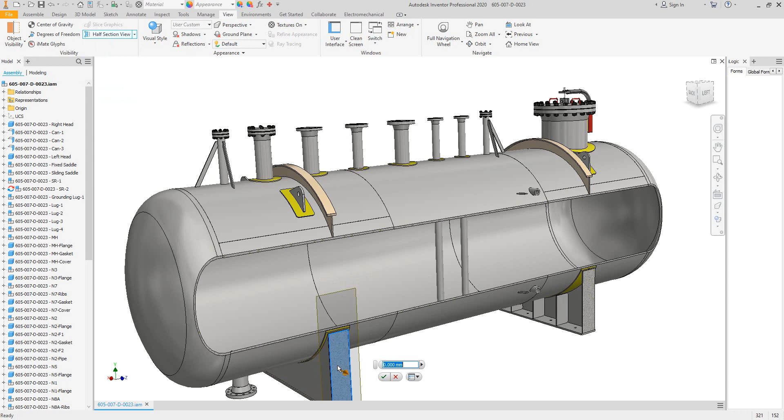Inshallah, in this part of the tutorial, we will discuss drawings creation. In the first part, we created the 3D model for this horizontal equipment. As mentioned in the previous tutorial, we made this vessel with those attachments, and today inshallah we will make a new element to include in the 3D model.

It's not included in the SEG library, so we will generate it manually and add it to the 3D model, and we will learn how to add it to the SEG bill of material to export it to our drawings. At the beginning, we will create those two clips here, and we will use a new type for the plates available in SEG.

If you select nozzle N2 pipe, which is this nozzle, and from external attachment, we will find a long plate. So we will select this one and make it support one, and from here let's select a longitudinal plate. You can make it external or internal, but in our case it's an external plate.

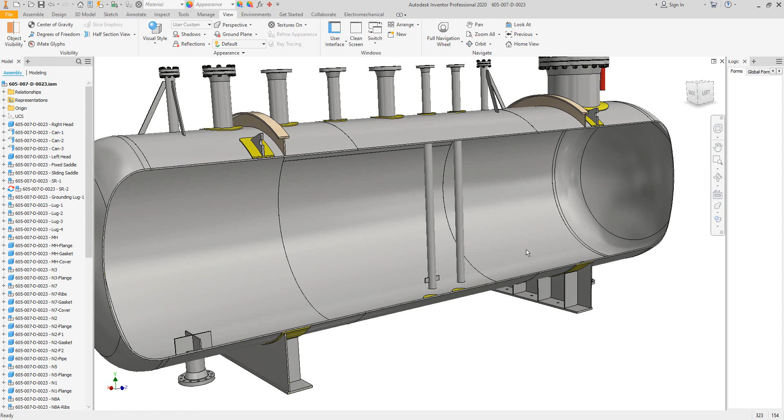Okay, now as you can see here, that's the clip, and we may need to rotate it 90 degrees. After that we will make a modification by adding a hole to this clip. So from here we will change the orientation to 90 degrees, increase the location a little bit, and click save. Let's add another clip to nozzle N9.

So from here we'll select elements, external attachment, long plate, and N9 support one. Let's keep all information as it is, and select 'looks like' N2 support to avoid repeating the information again, and click start the assembly to modify the first clip and create the other clip on nozzle N9.

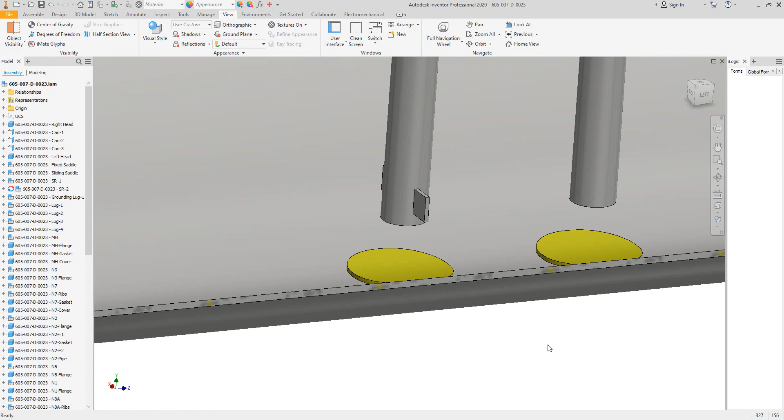Okay, now we have those two clips, and we need to make a hole cut on the first clip. So let's open the first clip from here, create a sketch, and add a point defined vertically to the middle and to the middle of the horizontal. Click finish, and from the hole feature, define the hole diameter to be, let's say, 14 millimeters, and click save. We will do the same thing with the second support.

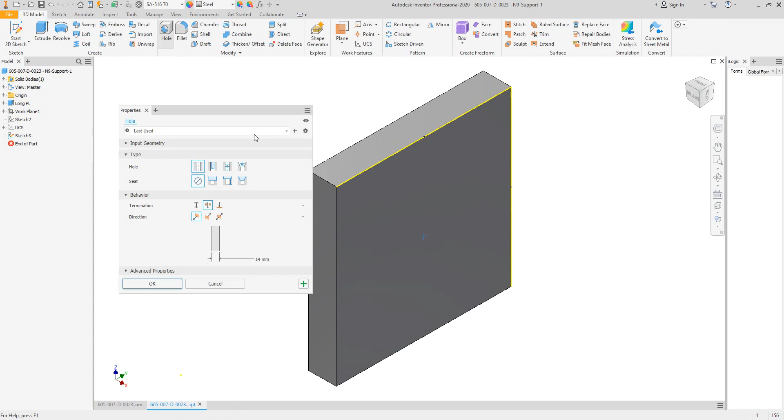So let's open the second clip on nozzle N9, add a hole at the middle, constrain it horizontally and vertically with the mid span of the plate, define the hole as 14 millimeters and click save. Now we've generated those. The next step is creating this part. This part is not included in SEG, so we will make it manually and learn how to create it and add it to the 3D model.

Okay, let's create a new part, create a sketch, and define the inside diameter of this equipment. Let's check the general arrangement. Here's the inside diameter, 1981. So 1981 is the inside diameter, and we have a pipe here with an outside diameter. Let's check the 3D model. It's a 2 inch pipe.

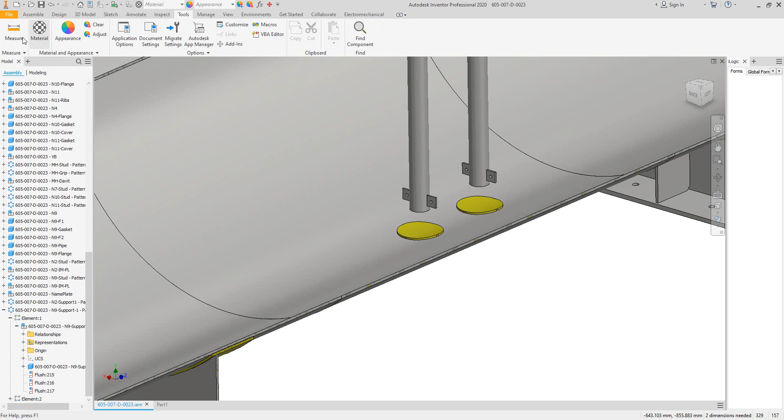If we select this one, that's the outside diameter of the pipe. Let's define this diameter, and we will measure the location from the drawing. Right now we have this clip with 50 millimeters on both sides, and a hole at the center with 14 millimeters, constrained horizontally and vertically with the center. So this point refers to the center span of the line.

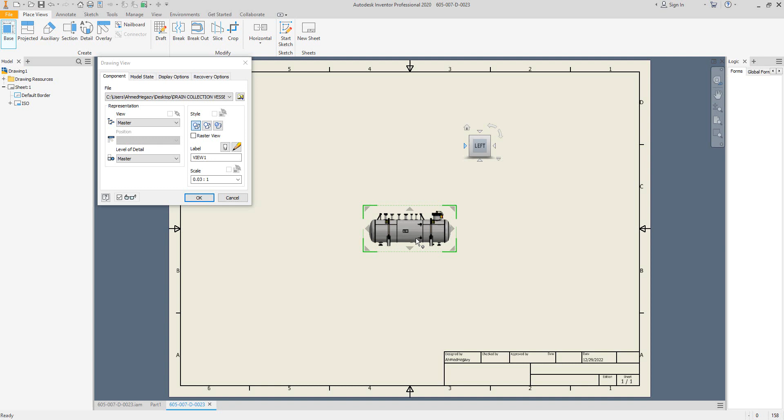Now let's convert all of those lines to construction lines, and we need to measure the actual location of this one. So let's create a quick drawing to check the dimension, add a view with scale 1 to 50, for example, and take a section before this nozzle, and measure the distance from here to the inside diameter of the vessel.

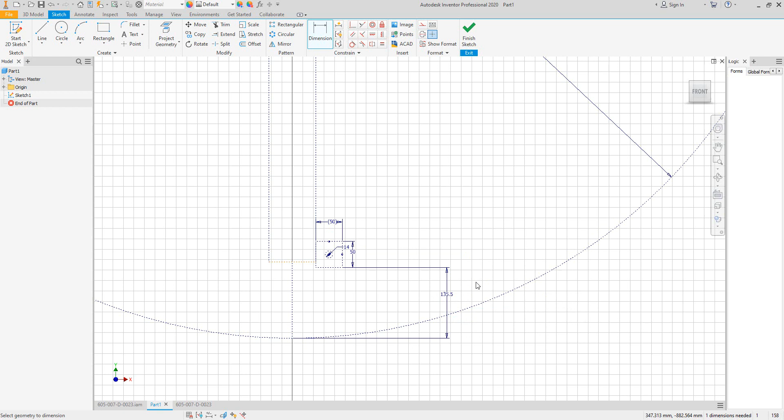So it's 350.5. Let's add a point at the center. From here to there, 135.5. So that's the location of this clip. Now let's draw the required clip with those dimensions.

Okay, so from here let's make that sketch, check that one. Okay, and again we have another line with 50 millimeters, so we have that one, and convert that one to construction line like that.

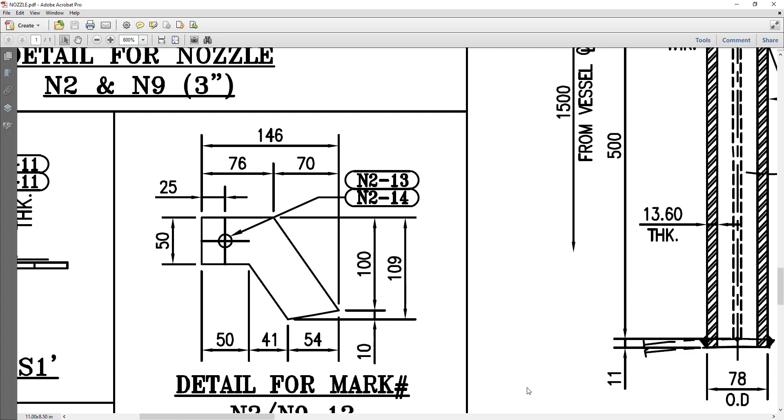Now we need to define those lengths, 76 and 70. So that value is 76 and 70. Okay, and for that one it's 41. So here it's 41.

One more thing, we need to add an arc here. So you can do it by using that one, which is arc, like that. Okay, and now let's finish the sketch and make extrude to this element.

So let's make an extrude with 8 millimeters. And from here, let's convert the material to steel. And the color, let's make it yellow, smooth yellow.

Okay, now we have this part. If we make this sketch visible, we can make a rotate or pattern, circular pattern for this part around the y-axis. So from here, let's select this pattern and make two plates from that one around the y-axis.

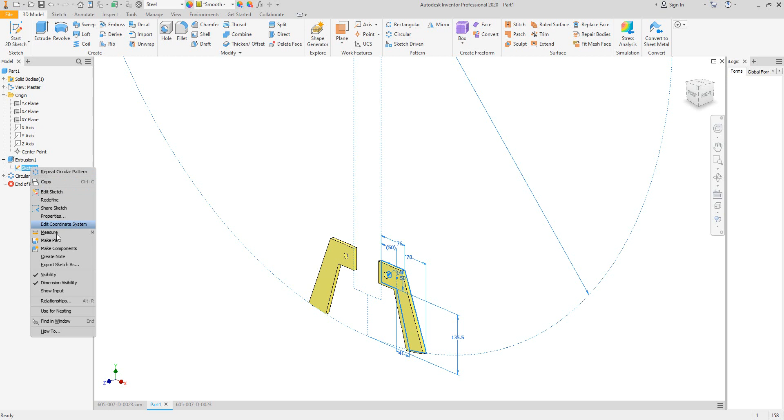And let's save this part. Now, if you try to save it from Autodesk Inventor by clicking on save, you will not be able to save. So for saving, you should open SEG software and from here select save document, save active document, and you will receive this form.

So from here, let's create a new project, external parts. So we will generate a new folder called external parts and add this part, which is N2 and N9 supports. Now let's add this part to the 3D model.

So from here, let's import this part. So from external parts, let's add those two items. And from here, we can make some constraints for that one.

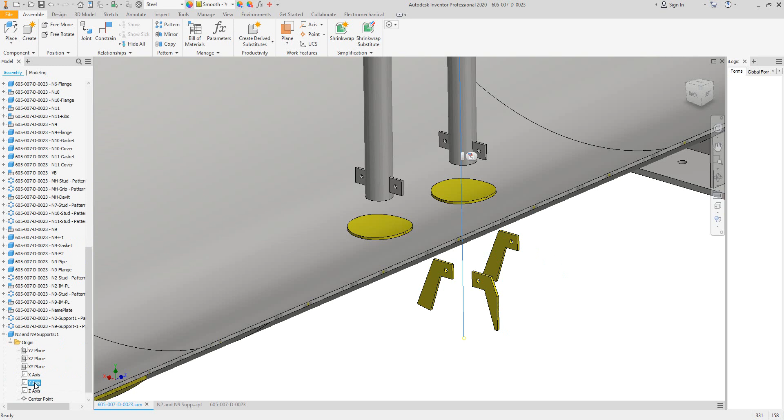So from here we have the first one for N2. We have the axis, which is y-axis. So we will make it with that one.

And from here, let's select that radius to the inside diameter of that one. So we have this support by that way. And if you try to move it little bit like that,

okay, so we can remove this constraint now, and from here we can make those parts by that way here fitted to that surface.

Okay, so it will be like that, and from here let's make that surface with that one, and we could rotate this plate a little bit back, okay, or make the extrude of this part to outside here. As you can see,

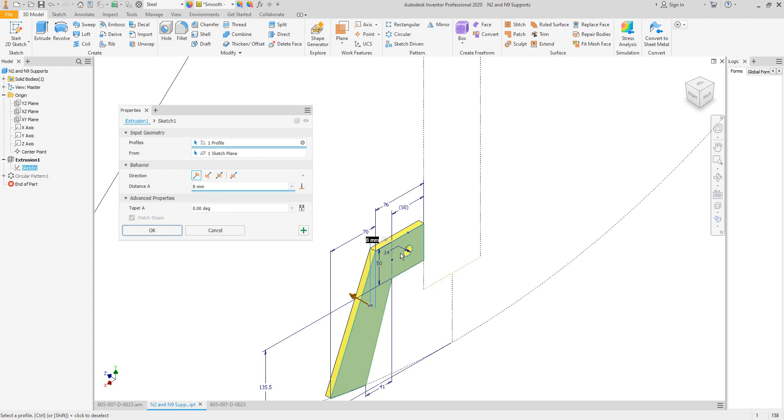we generated on that side, so we could move it a little bit with an offset from the main part. Okay, how we can do that?

As you can see, we have this work plane which is at the center of the part. So if we move it, take an instance from it with the half thickness of the plate, so the first plate, and let's move that at the beginning here, and from here let's define this sketch to be located on

that plane. Now in that case, you will get the correct configuration like that by moving this clip and make it shifted to the vessel.

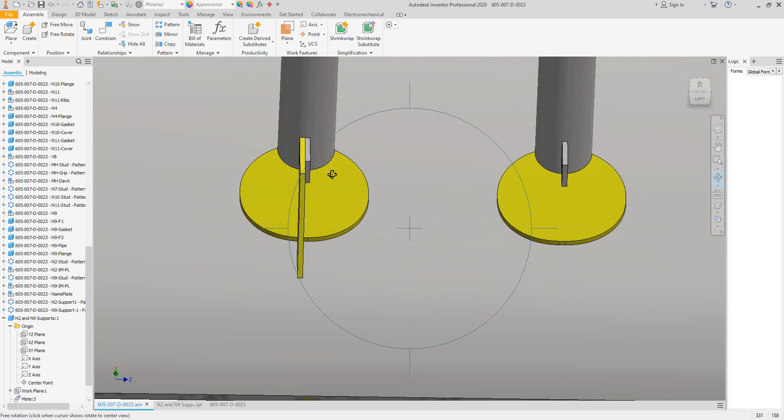Now the same thing, we will do it with the next support. So from here, let's make constraint with the center line here, and the same with the vessel center line with that one. And the same thing, we will do it

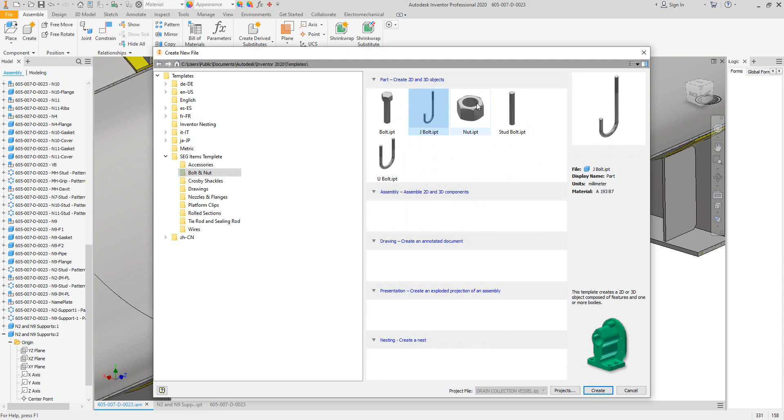here for that constraint. Now we have this support clips for this nozzle, and if you would like to add a tightening bolt for this one by using SEG library, external library, here from here, if you open the accessories, you will find some accessories here. You can use it for like bolts, nuts, if you would like to add that one.

Now we will learn how to add an external item to SEG bill of material. So from here, let's open the bill of material, and from external bill of material, let's select the vessel.

That's the first step. After that, let's add the quantity. We have 4 supports. The description is support clip, and for the technical characteristics, it's a plate.

Let's measure the dimensions of this plate. So the maximum height. Sorry, let's create a sketch here.

So let's make that one visible. And from here, let's measure the maximum width 146. Okay, and 177. Okay, 177, 146, 8 millimeters. Okay, the material is SA.

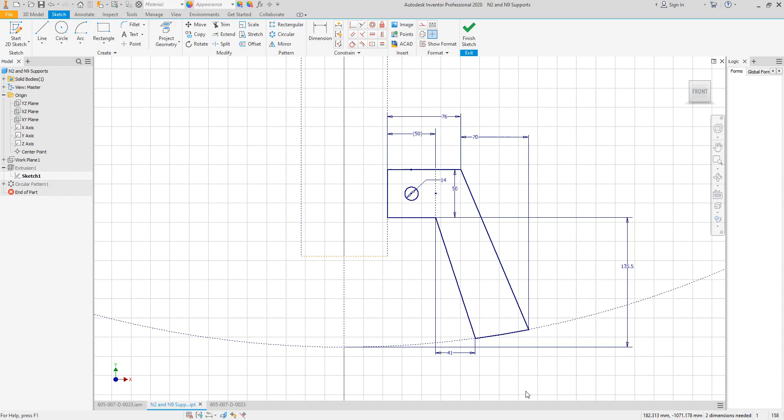That's the material, and for the weight, let's measure the weight for this part. It's 2.66 because we have two supports. For the part name, let's take the same name here, part number 1. Let's keep it as it is, empty. Now if you check the SEG bill of material, you will find the last row here for the pipe support. Now let's proceed to create our drawings.

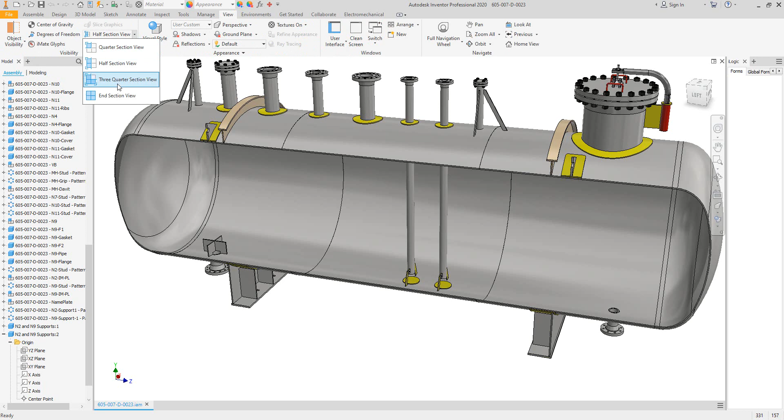So let's close this drawing, and we have the complete 3D model for the equipment. As we discussed in the first tutorial part, we generate the 3D model, make the modification for the stiffening ring, add all pipe supports, add the nameplate, add tightening bolts, and the manway. Now let's proceed with the drawings and take a look at how we can do that.

From the SEG tree, let's select the equipment node, and from here you will find the design data. Now we need to modify this design data. You have 3 different ways. The first way: if you would like to double click on the cell and modify the value directly from here, you can do that. By removing the selected checkbox, this value will not be exported to your drawing.

The second way is by importing an Excel sheet. That Excel sheet should be filled in a specific way. If we open it, you can see how to fill this Excel sheet. You should have 3 columns and no empty cells. You should have a value inside each cell, starting directly from A1 up to C12.

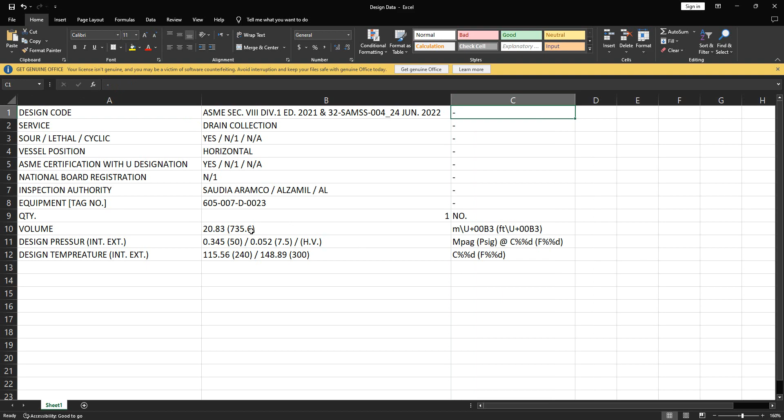Now we have those values, let's import that Excel sheet. From import Excel, we will select the design data file from the desktop, and SEG will ask us if we would like to empty the grid and fill it again, so we will accept yes. The previous design data will be removed and replaced with the new one. Let's click save. Now let's start creating the drawing.

From here, let's right click on the vessel, and from drawings, let's select create drawing, and define the drawing size. Let's select A1, and from the active view you can select the required views in your drawing. We will need to make an elevation view and a side view, after which we could make a key plan. Right now let's make 2 views: an elevation view and a back view, and define the spacing between them as 4 centimeters.

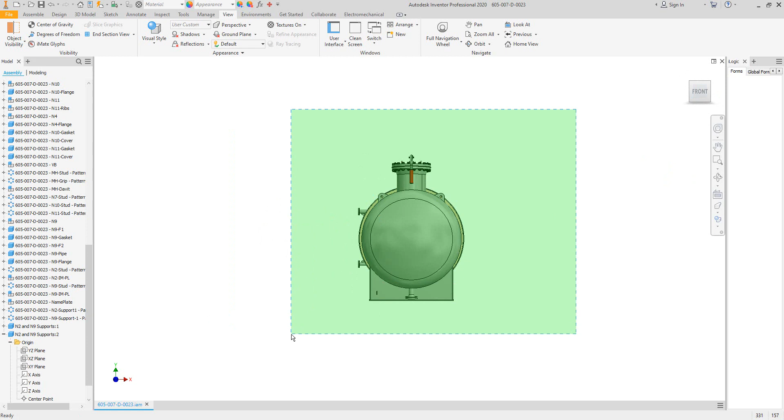Let's make the scale 1 to 14, and from here let's add the design data table, bill of material table, and the nozzle table. Let's add the notes too — if you have more notes, you can add them here. For the welding detail, let's open the welding detail section and select the required welding details.

From here let's add the drawing title: general arrangement. And this is the drawing number. From here, let's edit the revision table: revision 0, description 'issued for review', and prepared by.

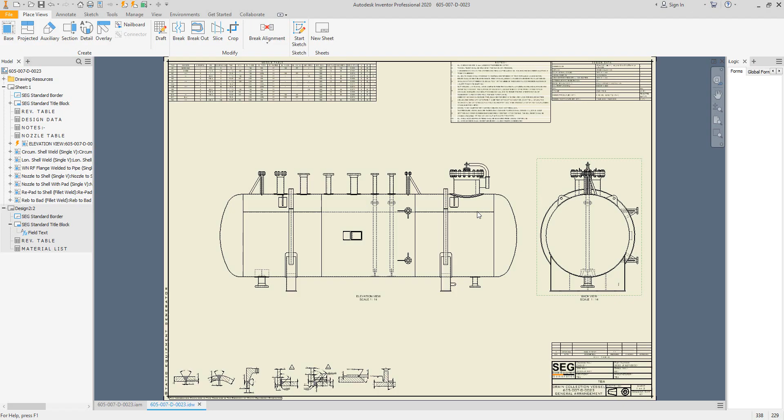Now we will make a modification on the second sheet, which is modifying the bill of material location. We will make it start from here, so let's arrange this one.

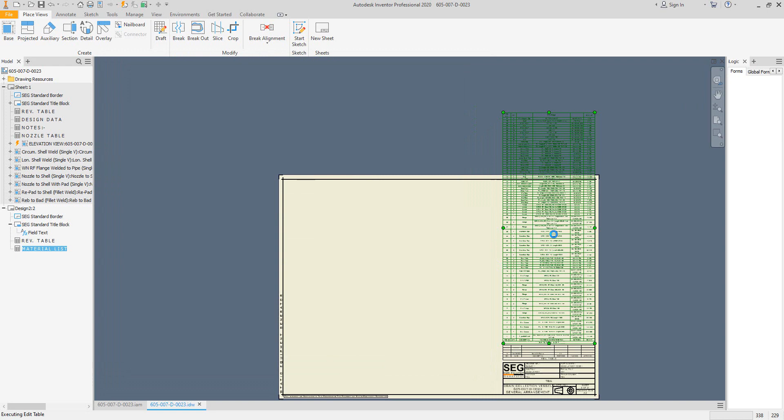From table layout, let's make the arrangement start from top to bottom like that, and the direction from top to bottom by that way. Let's click on save. Now you can figure that the bill of material arrangement will start from top to bottom.

So let's move the bill of material here. Okay, now that's the bill of material. You can increase the width of the cells by right clicking on that and increasing the width of the cell.

And the same thing we can do from here, increasing the width, and you can modify the alignment of the text inside the row by that way. So let's modify the alignment and click on save.

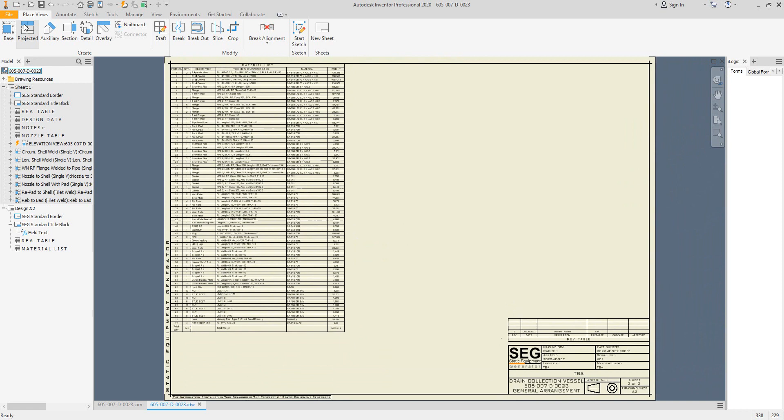Now we have a complete bill of material for your equipment, and let's add a 3D model view for the equipment here on that view. So let's make it scale 1 to 20.

Let's add it like that, and one more step we will do: let's remove this title, and from here we need to reflect the balloon item number for the items.

For example, if you select the balloons, from here you will find the different types of balloons. In that case, we will select item number balloon. If you select this head, for example, and select parts only, like that, you will find this balloon is empty. Same for the shell, if you select the shell, the other shell, you will find all balloons empty. So how to fill those balloons?

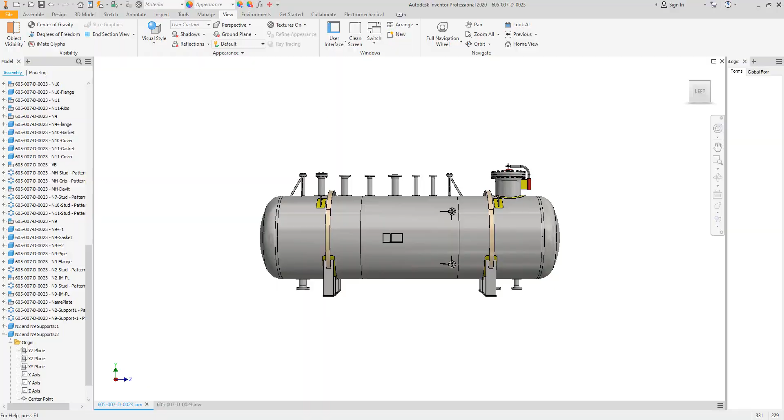From here, let's save this drawing, and let's come back to the SEG software, and from here we will select the update item number. This checkbox will give you the ability to reflect this item number to the 3D model on Autodesk Inventor, because

SEG makes a comparison between the items and selects the identical items. Like here in this flange, for example, we have 6 identical items: for nozzle N2 flange and N2 flange 2, N9 flange 1, flange 2, flange 3.

So SEG compares the description and the technical characteristics of the material and the weight of that item. If they are identical, that means they are symmetric or identical, so SEG will give them the same item number. So to reflect this item number, we will need to update the item number.

So from here, click on update item number. This process takes some time because it takes around 3 up to 5 seconds for each element. So we will wait until updating the item number completes our drawings.

Now, after updating the item number for the bill of material, if we come back to the drawings, automatically you can figure that the balloon will be filled. For example, here we have item number 1.

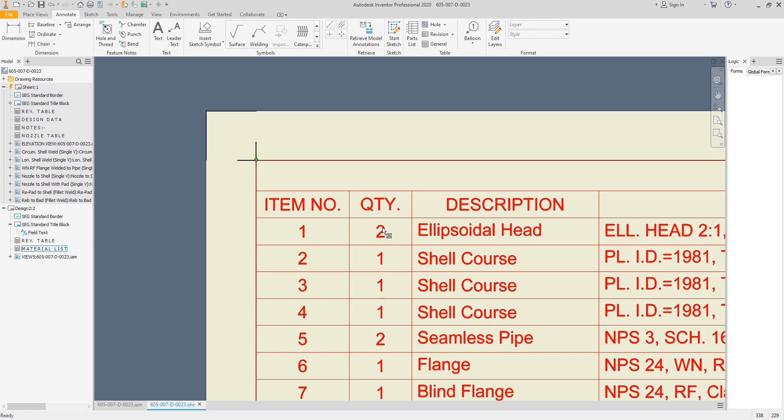If we go to the bill of material, item number 1, we have 2 items from this one. It's an ellipsoidal head with inside diameter with that value, nominal thickness, minimum thickness after forming a straight flange, and here that's the material and the weight for both items.

So if we select this item and select item number in bill of material, you will get that value. If we select this flange, it's item number 10. This pipe, it's item number 22.

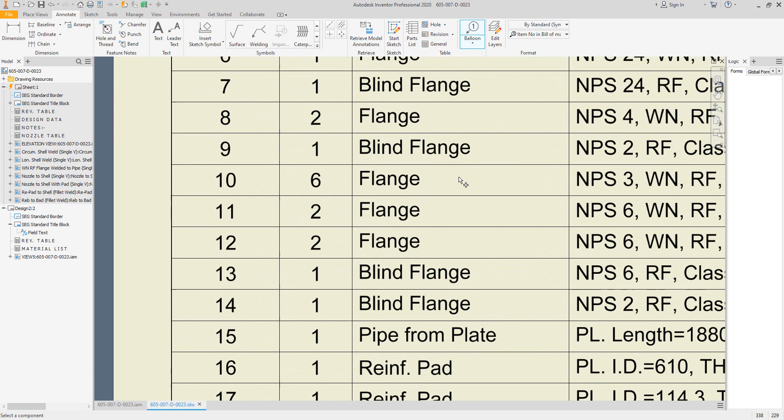So if we check item number 10, here it's a flange with 3 inches, weld neck raised face with class 150, schedule 160. And item number 22 is a seamless pipe, 3 inches, schedule 160, and that's the length of the pipe.

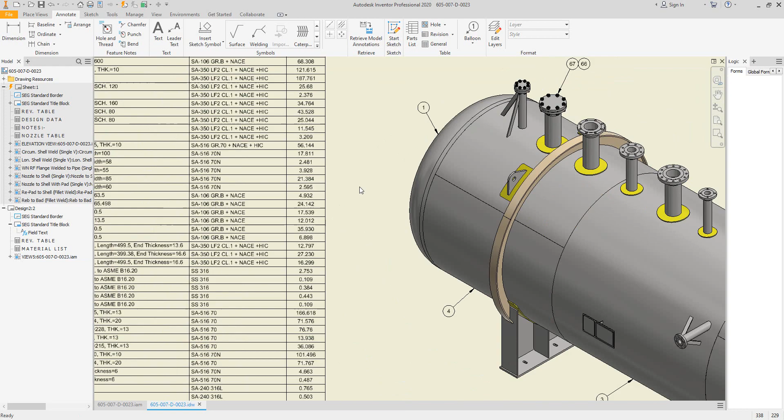Same if we select this stud bolt, for example, and here if we add a balloon for the nut, so item 66 and 67. So item 66 it's a nut, okay, and 67 is a stud bolt.

So by that way you can reflect the bill of material item number of the SEG bill of material to the 3D model and reflect it to your drawings.

Here let's come back to our drawing and let's create dimensions of this equipment by adding the definition of the inside diameter. So from here to there, let's define the inside diameter.

So from here, let's edit the text and add. You can see that the value is fixed, it's a constraint, you cannot change it if you modify the text. We will just add a notification that the inside diameter.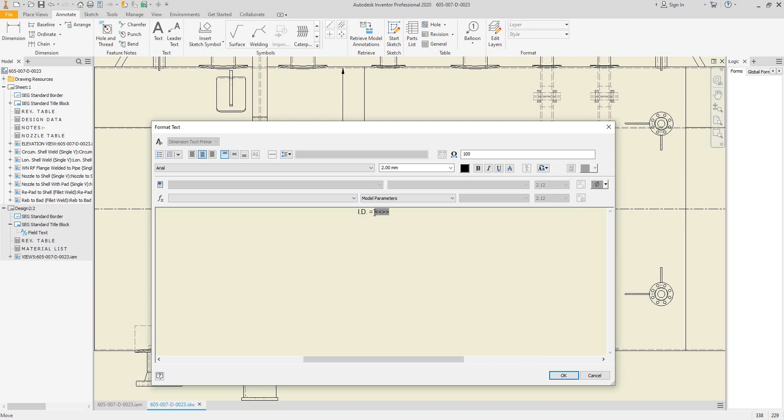Okay, let's add the tan lines here and on the other head. Those are the tan lines. And let's add the center lines of nozzles to define the location of the nozzles. So from here, that's the first center line, the saddle for those nozzles.

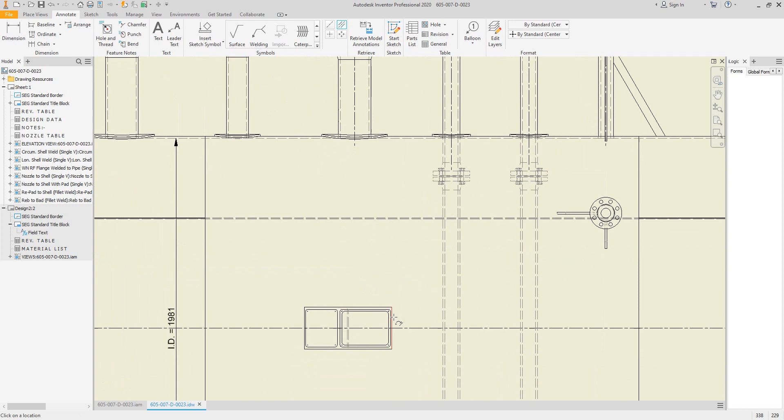That one. It's a nameplate nozzle. For the other nozzles, we will do the same thing. The second saddle, that nozzle for the lifting lugs.

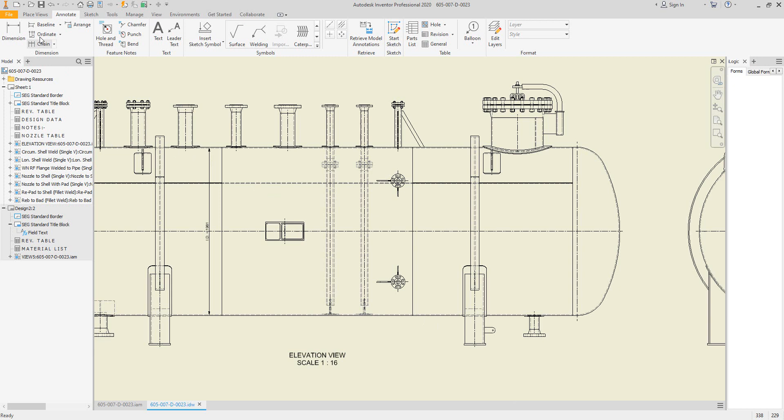Here you can figure that the datum line is located on the right hand side, so we will define the datum point to be at that line. So from here, from ordinate, we will select the vessel and define the datum line to be at the tan line. And now let's add the location of the nozzles for all nozzles like that.

So automatically it will appear by that way. The same thing we will do it at the bottom nozzles. So from here, let's select this one, select the saddles and the second saddle.

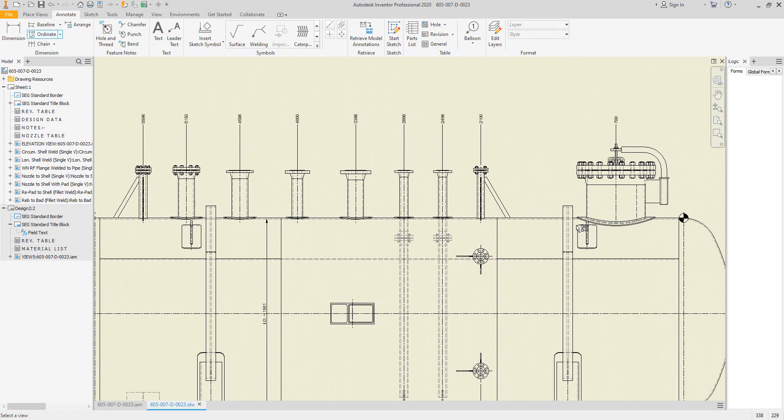And for the lifting lugs, we forgot to make it. So from here, let's select this one, the first lifting lug, and that's the second lifting lug.

Okay, now let's add the balloons, and let's hide the origin point. So from here, let's right click on any dimension and hide the origin point. Let's define the shell lengths.

So that's the first shell length, and that's the straight flange. The second course, the third one, and the second straight flange. And we will make a modification here for that one.

So let's define straight flange equals like that, and let's copy that modification here. So it's the second straight flange length.

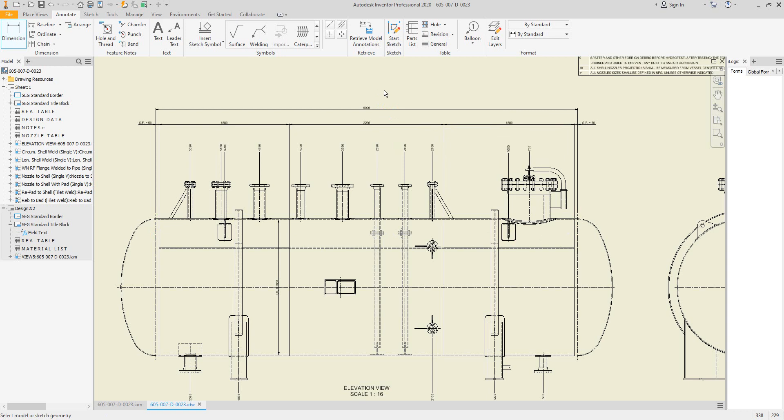Okay, now let's define the tan to tan. So let's measure the value from here to there, and let's add a text, tan to tan. Okay.

That value. And let's add the balloons for nozzles. So from here, let's select balloon, and from here select nozzle tag. So, and from here let's select the nozzle balloon. Okay, as you can figure, we selected the manhole flange, not the manhole nozzle.

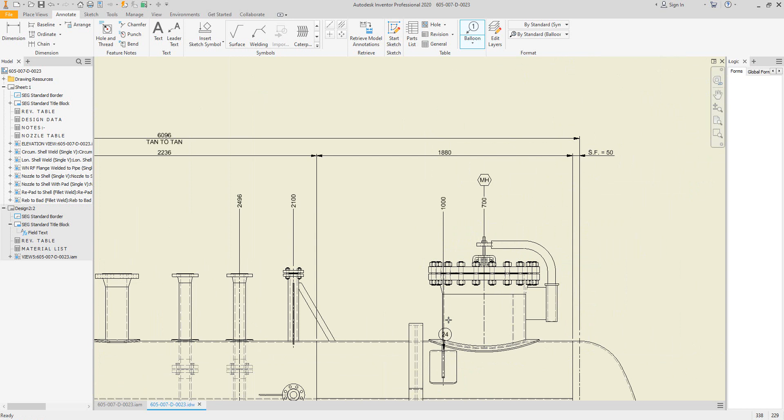So you can attach a balloon like that for the manhole and remove the previous balloon. And for the lifting lug, let's select the lifting lug, and from here select nozzle tag. So it's lifting lug 1 for this nozzle.

It's N7, N9. Okay, that's the flange. So by the same way, let's select the nozzle itself and remove that balloon for the flange. Select a balloon for the nozzle tag. Like that.

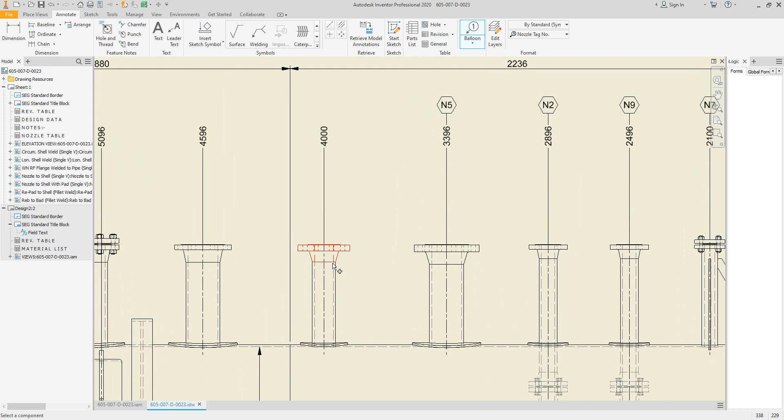Make it aligned with the next balloon. No problem if you cannot select the nozzle, you can select the flange. After that, define the balloon of the nozzle in a correct way. Like that. Sorry.

Make it aligned by clicking on Control during selection. For this nozzle, we will select the nozzle itself, and the same for the other one. Select the nozzle, not the flange, and remove the balloon of the flange. So we have the balloons like that by that way.

And here let's add another balloon for that nozzle. So let's select this nozzle, and from nozzle tags, let's add a balloon for this nozzle. So from here, let's select this one. Sorry. Continue. And the same for this nozzle.

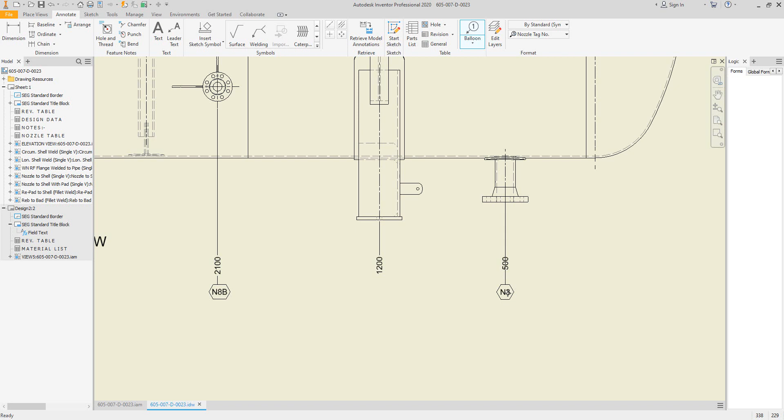We could select, sorry, we could select control during selection to make it aligned and perpendicular to another nozzle. So same thing here. That's the sliding saddle, and here we have the fixed saddle.

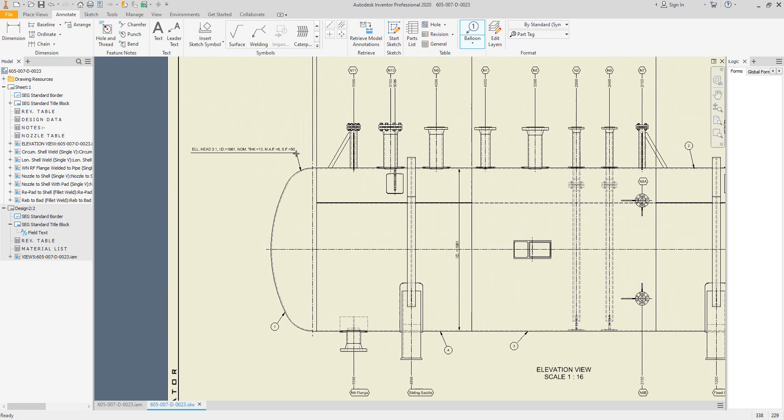Okay, and if you would like to add some related balloons, define the item number like that for the main items, like the shell courses. And if you would like to add a notification like the part tag, like this head description, you can add it like that.

For that same view, we will add some notification like longitudinal welding line orientation and the datum line. So from here, let's select that view and click on S, or from here you can select sketch, start sketch. So you can add some lines or text over this view. So from here, let's define the datum line.

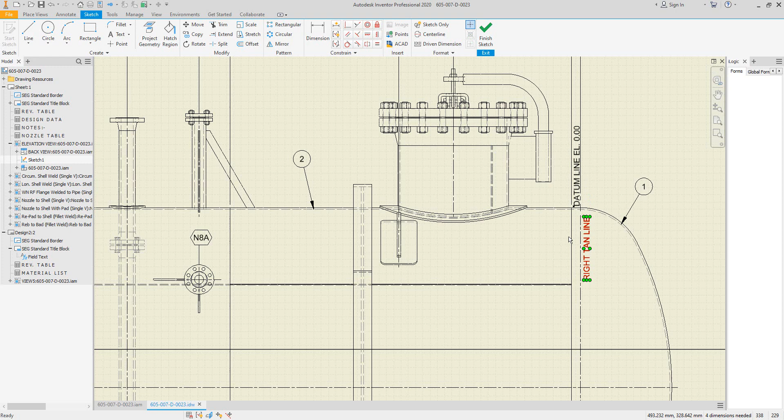Okay, that's the datum line. And let's rotate this value counterclockwise. So that's the datum line. And if you would like to add a right tan line, well, like that. Okay, rotate it like that. And take a copy from that one, from here to there, and define it as right tan line, left tan line, like that.

Now let's add the seam line orientation. So it's longitudinal seam line 1. Okay, that's the longitudinal seam line 1. So let's take a copy from that one to here, the second longitudinal seam line and the third one. So that's the second one, and here the third one.

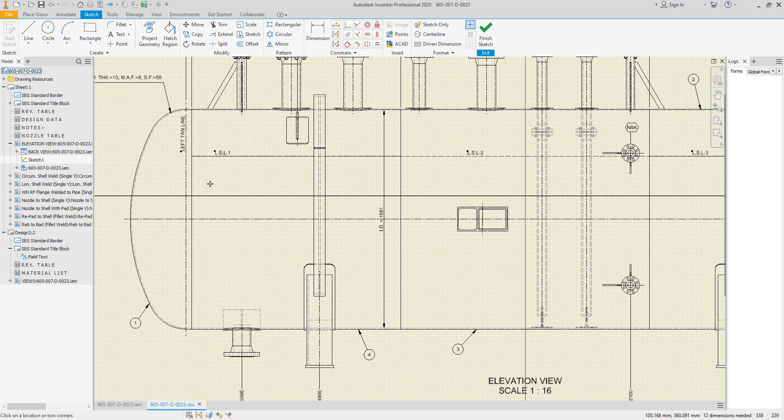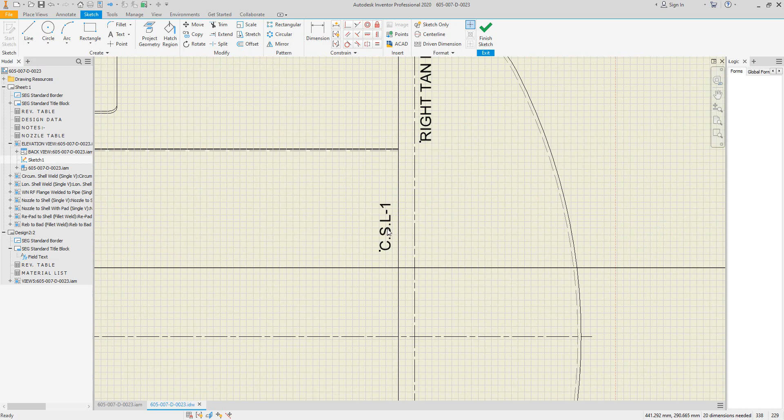And let's add a circumference seam line 1, and let's rotate it like that. Take a copy, select first, and take a reference point. We have that line, another line here, and the last one. So that's number 2, seam line 2, 3, and the last one, number 4. Okay, now let's click on finish.

To define the accurate center of gravity of this one, you can generate it automatically from here by clicking on the view, and from here select center of gravity. So here that's the center of gravity, and by using the SEG blocks you can add this to define the center of gravity of this equipment in the empty case.

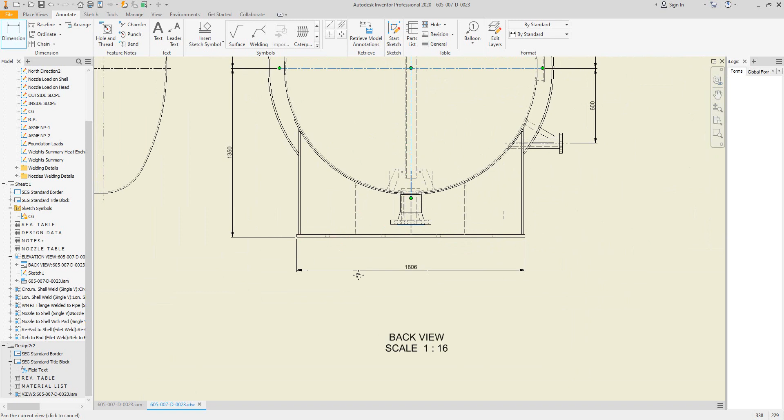Now let's add some other dimensions here on the other view, like the saddle height, the base plate width, and let's move this title down here, the offset of both nozzles, the projection of the nozzle. So from here to there, let's measure to the facing of the flange. The same thing we will do with the bottom flanges, the projection for the bottom flanges, and the projection of those nozzles to the center line.

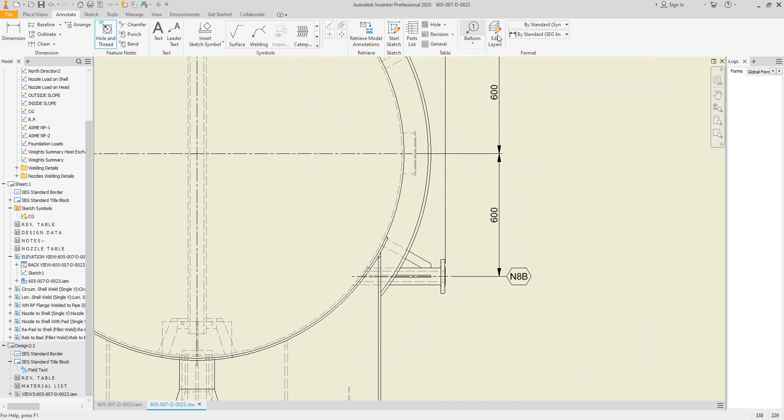So you can add that value like that here, or you could move it a little bit to the top here, so that will be the center line from the top, like that. And let's add some balloons here and there. So that's the nozzle tag. Let's select nozzle tag, and let's add that one here and there. The same for the nameplate. Sorry. Okay, and let's add a location for the nameplate here, because we forgot to add it. So you can move it down here, and let's add a balloon to the nameplate from the reference line.

Let's move this title below here, and let's define the location of the saddles and the spacing between them from the tan lines, like that. And let's add a key plan for that one. So from here, let's select project view, select that view, and let's create the key plan. And for this key plan, we will change the scale. So let's name it as key plan.

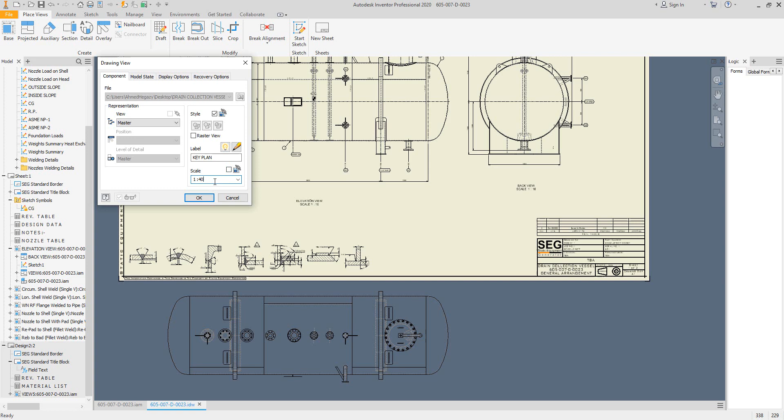And if you would like to make a modification on the text here, you can do that. But right now, let's change the scale. So let's make it 1 to 40 and break the view to be able to change the location of that one. So we can move it like that. So here it's the plan. So here that's the view, which is the key plan. You can move it up here, or if you would like to move it outside the drawing, you can do that.

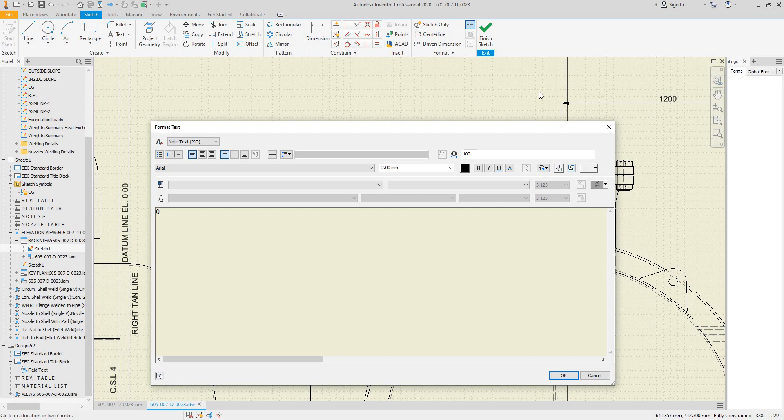And from here, you can define the longitudinal line orientation. So from here, the orientation of the vessel, it's 0 degrees, 90 degrees, 180, and 270 degrees. And here it's 0 degrees. Okay, and click finish.

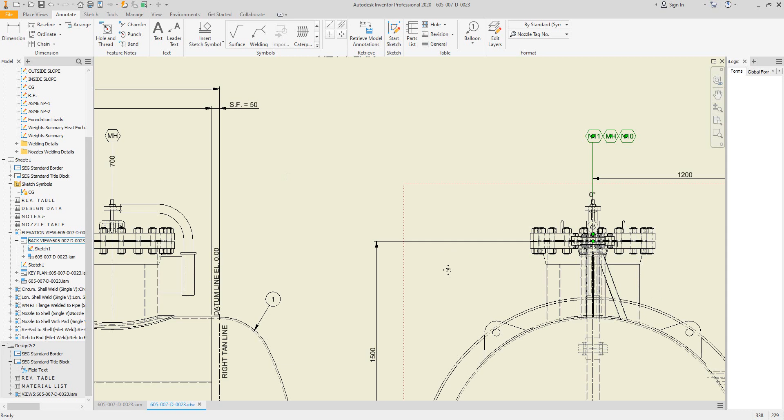Now if you would like to add some balloons at the top, you can add them that way, and by using attach balloons you could add the other nozzles that way. And if you would like to add another nozzle, for example N7 here, we cannot select N7 because we have too many lines, so to select it easily you can attach a balloon like that. After that, double click and modify it to 7. That way you can add a text like that on the balloon tag.

And here, let's make an extend for the center line. And for the balloons, let's select nozzle N4, and let's add attach balloon for the other nozzle, which is N3. Now we have the general arrangement drawing, which includes the revision table, the design data table, and the nozzle table here. Now let's add some welding notations.

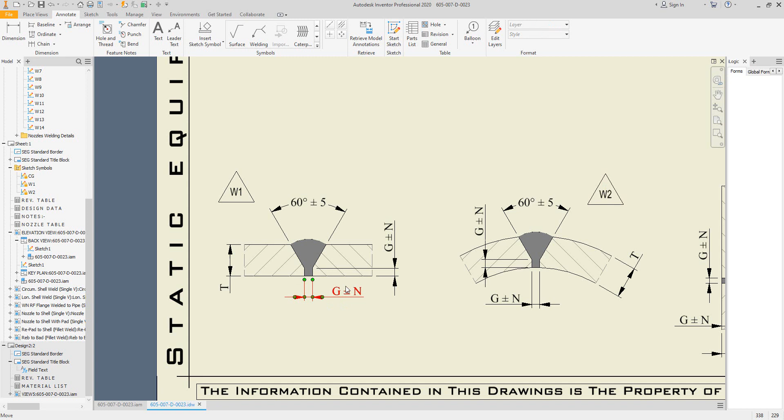For the welding notations here, we have this detail for the circumferential welding. So let's name it as W1, and here we have W2 for the longitudinal welding line orientation. And now if you would like to modify that, we can use edit text to modify this value as 4 minus 1, and here you can define that value, sorry, 2, and that value is 1. And you can use copy properties if you would like to define this that way, like that. The same thing we will do with that one.

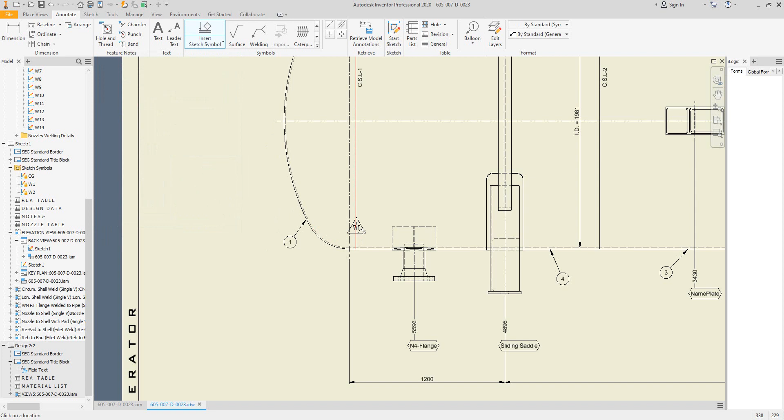Okay, so you can modify and change the welding detail. Now let's add this balloon and refer it on that drawing. So from here, let's select insert symbols, and from here let's select symbol W1 for the circumference welding lines. So we can define the circumference welding lines like that.

And for the longitudinal welding lines, let's select W2, so we can define the longitudinal welding lines like that. Sorry, let's move that one to here. And for the nozzle to flange, let's add welding line number 3. So it's welding line number 3 for nozzle to pipe. So from here, let's select style 3.

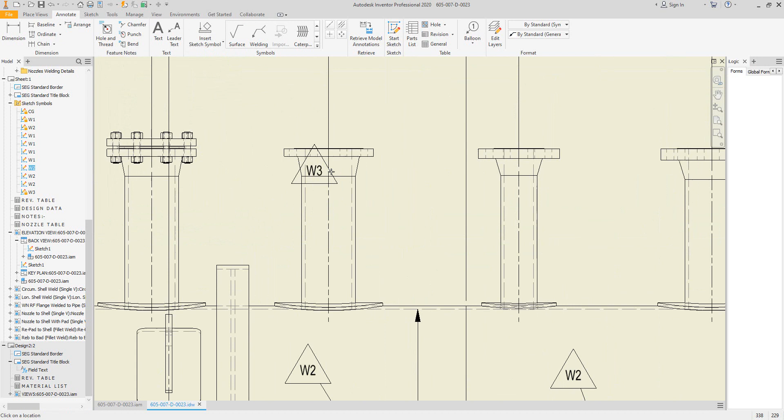Okay, and sorry, for those styles, it's welding detail 2, so let's modify it like that. Okay, and let's insert W3. So if you would like to modify something like that, you can add the welding style to the nozzle by that way. With the nozzle to shell for nozzles without reinforced pad, it's

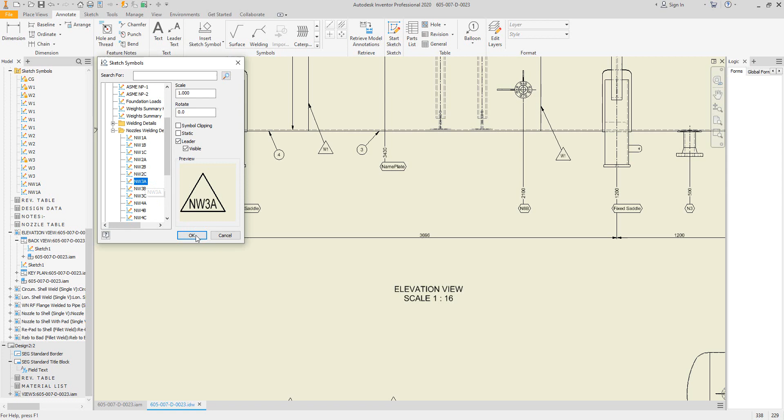NW1A. So from here, if you open the nozzle details, NW1A. So for nozzles without reinforced pad, the weld detail here will be related to that. And for nozzles with reinforced pad, it's NW3A. So from here, NW3A. So we can modify or edit the weld style.

By that way, it depends on your drawing requirements. So if you need to add something like that, you can add it. If you don't need it, it's up to you. Now we have the general arrangement drawing. We can deal with this general arrangement drawing by exporting it in DXF extension, DWG extension, or PDF.

So if you would like to print this drawing in PDF format, if you right click on the drawing, from here you can export to, and you will find here a list of extensions you can export to, like DWF, PDF, all of that. And you can make a save copy as by using this button. So if you click on save copy as and open this form, you will be able to select some other extensions like a PDF extension.

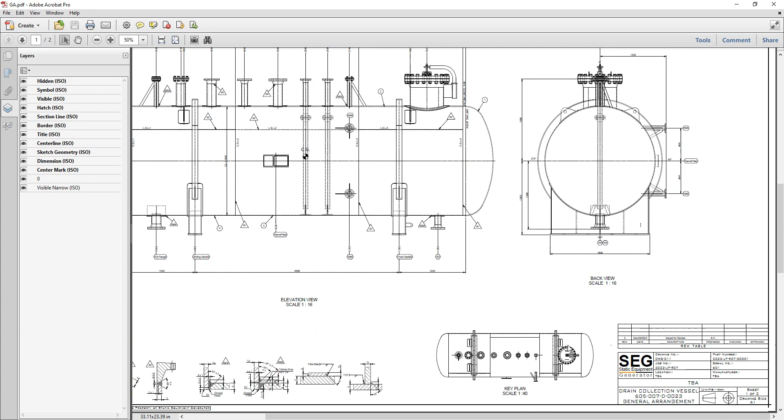And the second sheet includes the bill of material and the balloons, which indicate the item number in the bill of material. By the same way, you can make other drawings for, let's say, the support saddles, for nozzles, for any other attachment. So let's try that. So from here, let's select saddle 1. So let's select the fixed saddle. And from here, let's select right click and create drawing.

Let's select the size of the drawing as A2. Define the number of views. We will need 2 views. So for the fixed saddle, let's open the fixed saddle. Here we have the 3D model of this fixed saddle. And by the way, we need to take a look at the saddle from this view, which is the back view. So let's define the spacing, and the elevation view will be the back view. So that view, we will use it as an elevation view in our drawing.

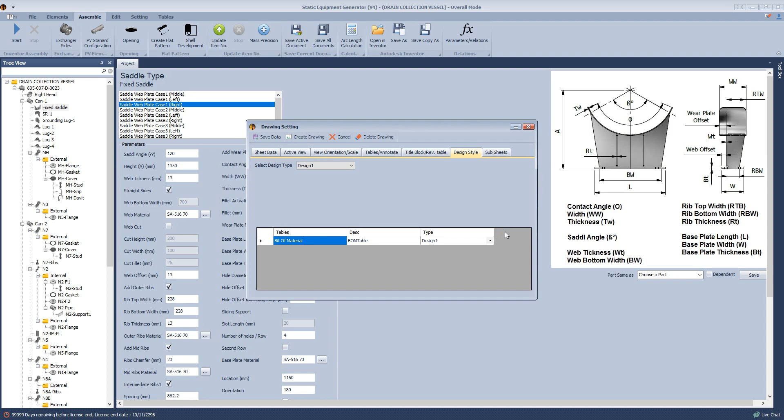So let's select that. And for the scale, let's make it 1:8. Let's add a bill of material to this one. Let's remove the notes and the welding details. From here, it's saddle detail, drawing number, and let's edit this table. It's revision 0. Let's add this one, other empty cells, and it's one sheet, and let's create the drawing.

Here the saddle details and the bill of material of the saddle. Now let's add some annotations or some dimensions to this saddle, like the saddle base plate dimensions and the height of each rib, like that, the spacing from here to there, spacing from here to there.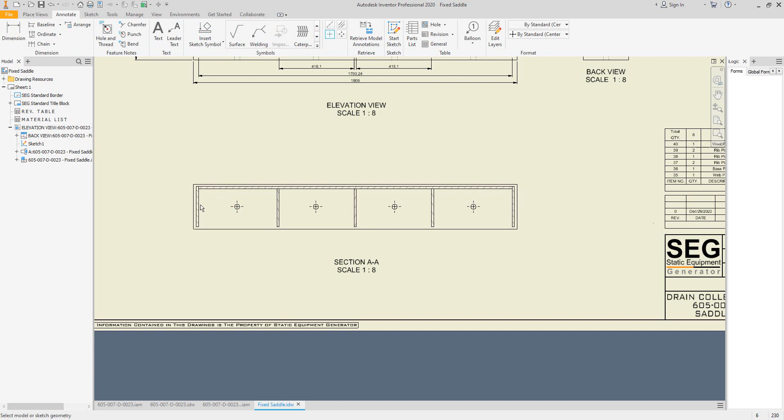And let's take a section on that view to specify the hole dimensions. So let's add center lines like that and define the offset of this one from here to there. We have 13 millimeters. The offset from here to there.

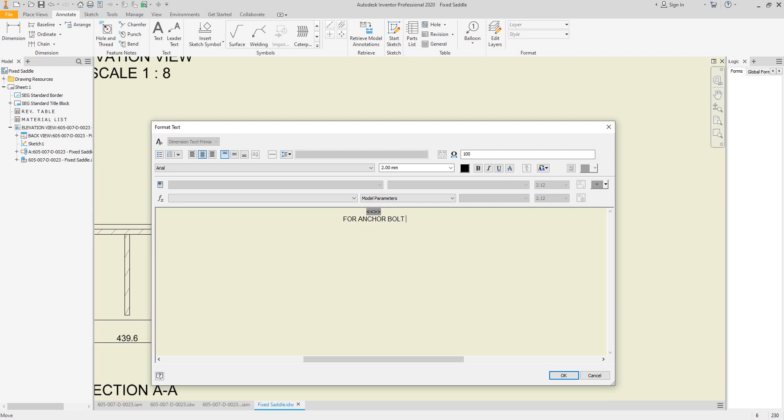The hole diameter. And if you would like to add an annotation here, like that. On the other view, let's add some other dimensions like that, the wear plate width, the top width of that one. Let's add some balloons. So the parts, wear plate and the inside ribs.

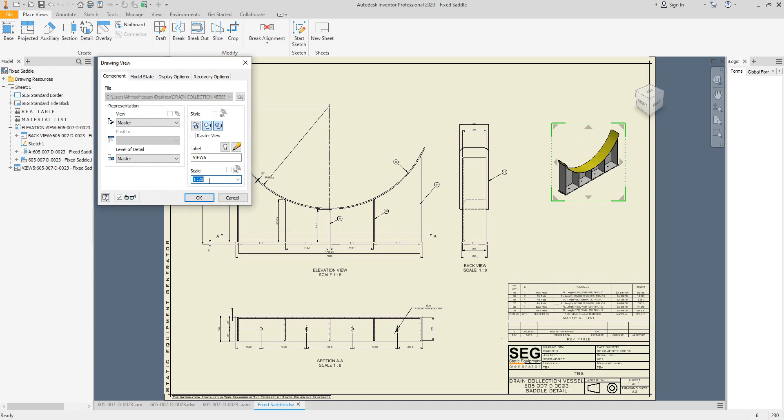Let's add the inside diameter, the thickness of the wear plate, the thickness of the base plate, and if you would like to add a 3D view for this saddle, you can add it like that, and you can control the color and the scale of this one. Let's increase it a little bit, like 14. Okay, and you could add balloons on it like that.

Okay, and let's move this view a little bit by hand like that. And for the second one, if you would like to add the other base plate detail on the same drawing and add another detail for the grounding lug, we can do that on the same drawing, but by hand.

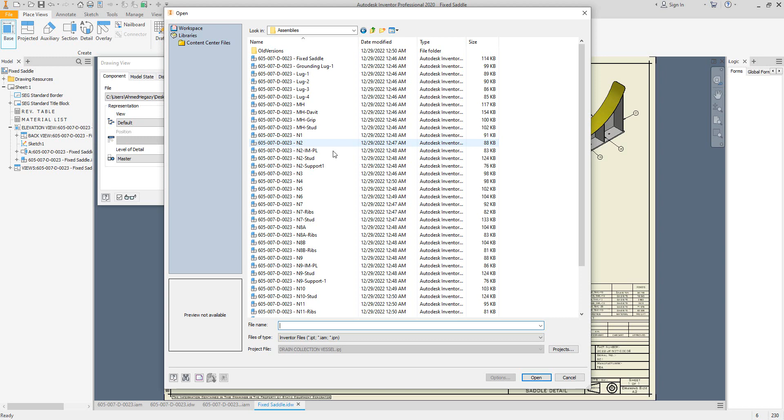So from here, let's insert a view and let's select the second saddle, which is the sliding saddle. So from here, let's select the sliding saddle, move it here and define the scale, the same scale of this one, 1 to 8, I think. Okay, it's 1 to 8. Okay, and make it aligned with that view, align vertical.

And let's take a section here, another section for that view for the sliding saddle. So we can add another view here and modify that for the sliding saddle. So this view will be for the sliding saddle. So let's add some modifications, center lines for that one. So we can modify and add the dimensions like the previous one.

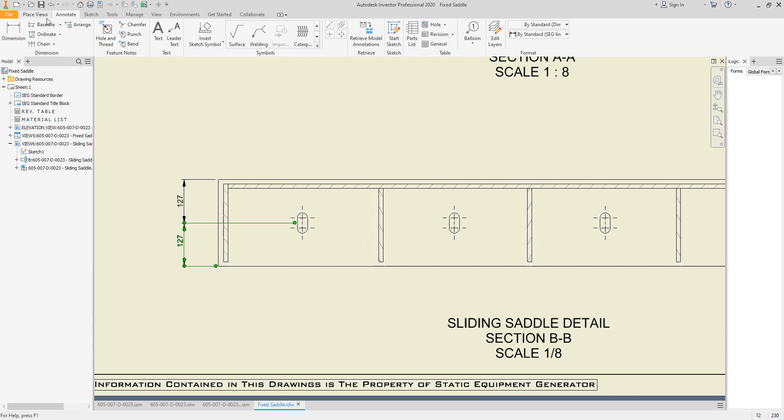And let's make one more thing, like making a section detail. So from here let's select this hole outside here and increase the scale to 1 to 3, and let's modify or edit the dimensions. So from here to there, the hole diameter or the slotted hole dimensions will be like that.

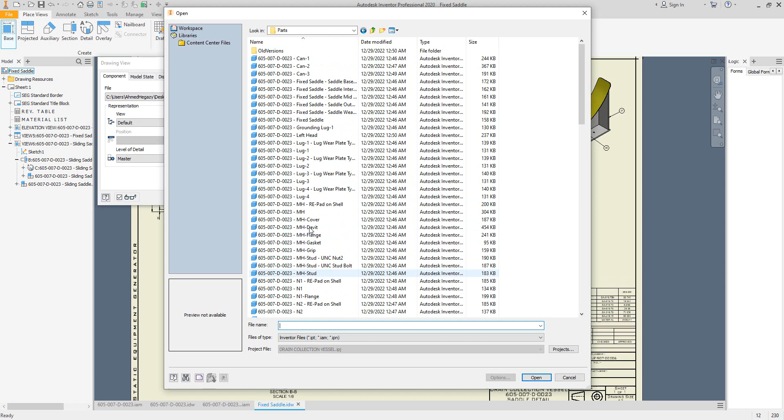Okay, now let's add the grounding lug detail. So from views, let's open the parts, and from here let's select the grounding lug. Now you can change the orientation of the view, the scale of the view, 1 to 2, move it here and make it as grounding lug, and add the dimensions for the grounding lug.

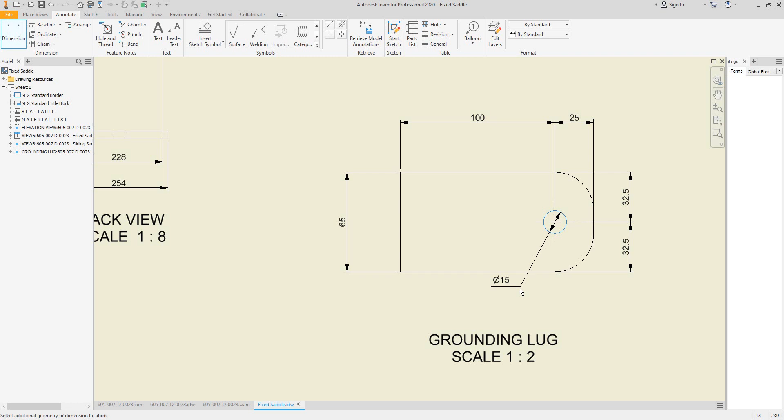Sorry, that's the center line. From here, let's define this value to be like that. The same offset from here to there, the hole diameter and the fillet. Now you have this item. If you would like to add a balloon to this one, it will be item 48, and for this base plate, if you select parts list, it will be item 41.

So if we come back to our general arrangement here and open the second detail, 41 is a base plate, so that's the description of this base plate. If you would like to add a tag number for that one, like a description for this plate, you can do it like that, or for that rib you can add a description for plates which identifies the length and width of the plates. Here, for example, that's the length of the rib and that's the width of the rib with the thickness.

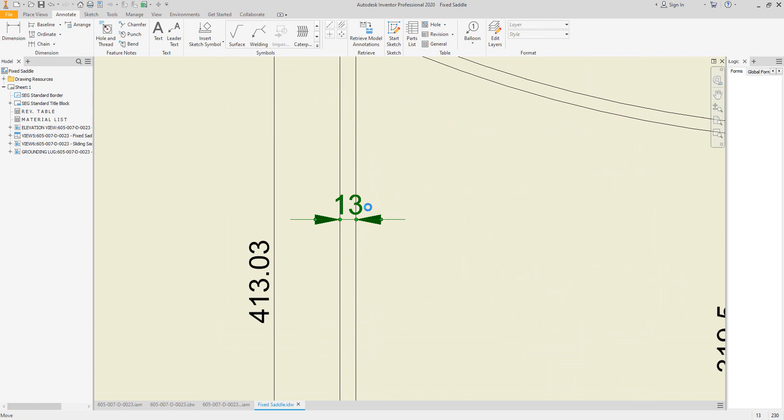So let's add the thicknesses here, 13 millimeters, 13 millimeters. So as you can see, we generated the 3D model in the previous tutorial, and we made some details by hand, like the internal supports here for the nozzle, and made some other modifications for the ring. In the previous video we made the cut on the rings by hand.

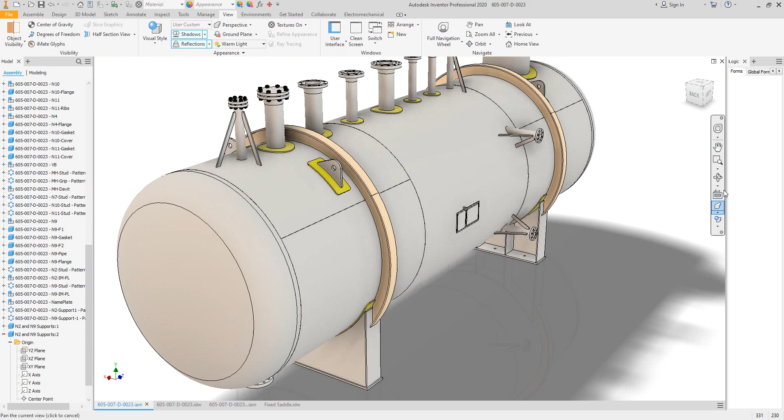So after creating the 3D model, we proceeded with generating the fabrication drawings of this equipment, creating the general arrangement drawing in 2 sheets. The first sheet includes the views and tables like the design table, notes table, and nozzle table. We added some dimensions, selected the welding details, added a key plan, and on the second sheet we generated the bill of material and a 3D model, and added some balloons to this 3D model.

Let's add some other balloons, like for the lifting lug, let's attach another balloon for the lifting lug clip, and here let's add a balloon for this nozzle, and let's select the pipe and the repad. So that's the pipe and the repad. Okay, so that way you can add balloons for items. So it's item 47. So let's add a ring.

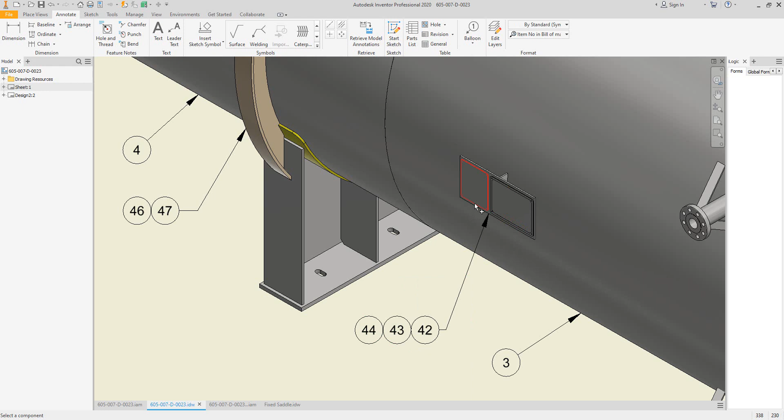So here we have those items for the nameplate. Let's select the nameplate, the nameplate clips, the ASME nameplate, and the client nameplate. So you can add balloons that way. Some other balloons for this nozzle and the stiffening rings. So we have those rings here. Some other balloons for that nozzle, attach this balloon and another balloon. Okay, so item 56 is repeated, so they have the same dimensions: two supports with the same width and thickness.

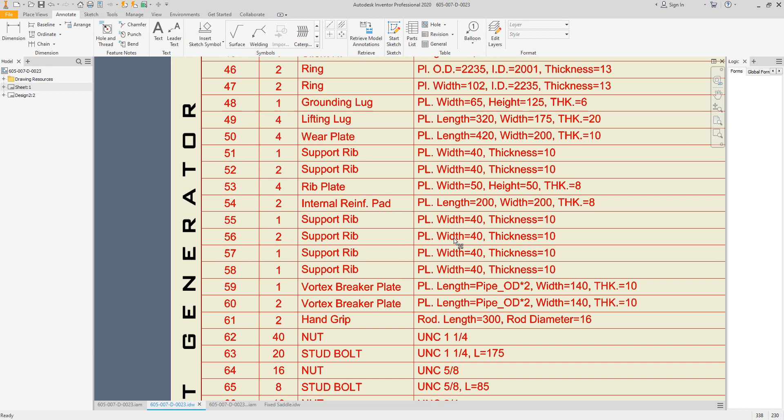Okay, so that way we generated the 3D model, the fabrication drawings, and a saddle detail, fixed and sliding saddle, with some other details like the grounding lug and the 3D model for the saddle. Hope that in this session we covered some of your questions about drawing generation by the software and how we can use it.